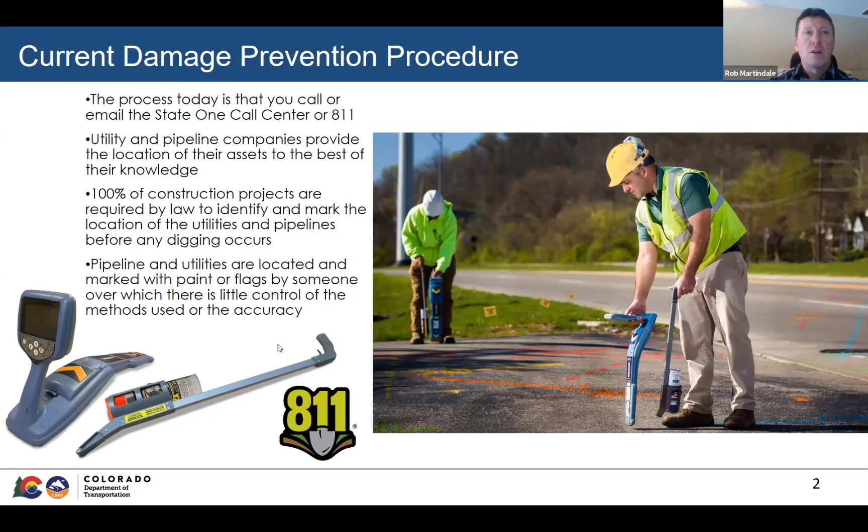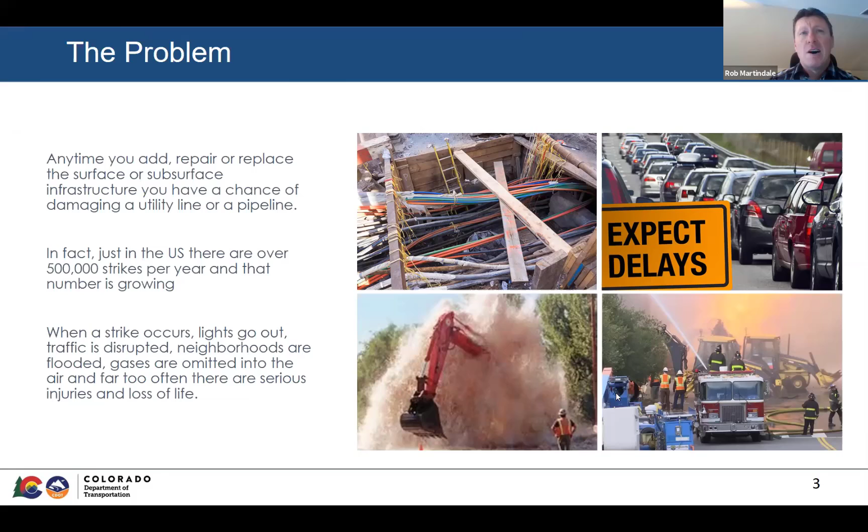Of course, we're still seeing a high degree of strikes in Colorado, and Jeff, you probably recognize these numbers because a lot of them come from you, but I don't know if this particular number in the United States is still hovering around 500,000 strikes a year, but it's a lot. It's too many to be functioning well. But some of it is because of agencies like CDOT allowing utilities in our rights of way without proper documentation on where they put them, how they installed them, things like that. So part of CDOT's efforts, which I'll talk about in detail a little bit more later, is trying to resolve

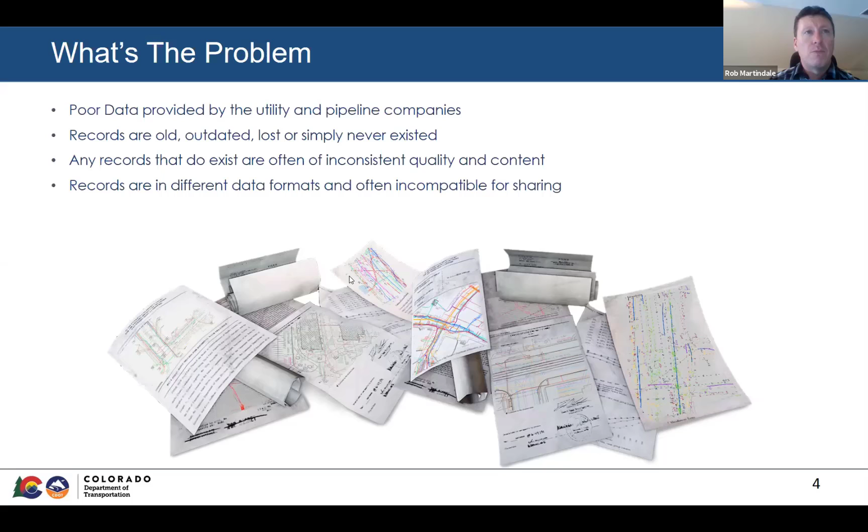some of that. Also, we see a lot of poor records, a lot of really bad records that are in the system or hardly legible. They're hard to figure out, and so a lot of the locators that are relying on these records, I think they struggle a little bit with even trying to understand what the utility owner has in the project area or in the one call area to actually try to find and locate. And so that's definitely a major sticking point that we've found throughout our investigation with research and whatnot.

Here's another example of just an as-built record that we've seen. And it's not to poke fun at anybody, but it's just to show that there are better ways today than maybe in the past to document utility installations.

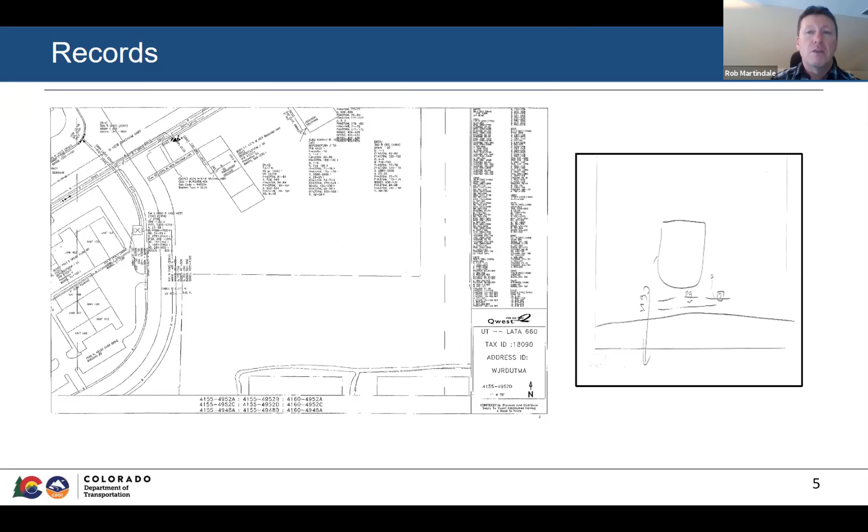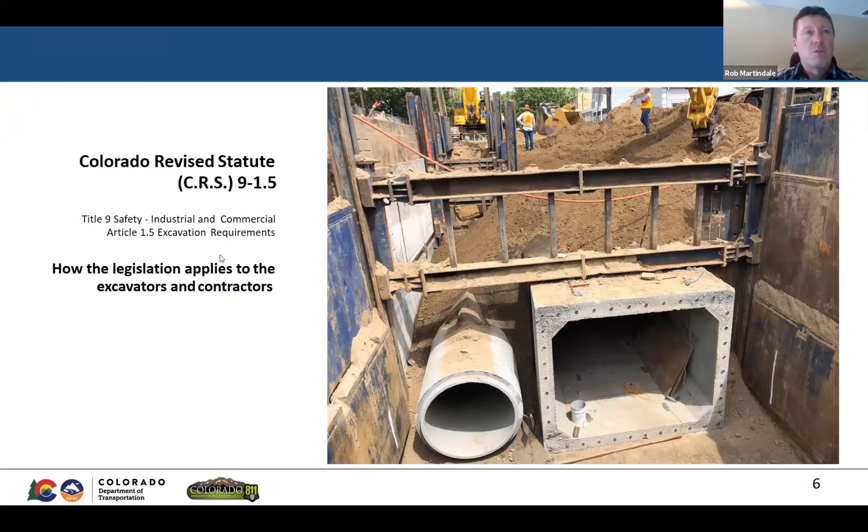So in Colorado in 2018, there was a bill that went through and became Colorado state statute, modifying our Colorado Revised Statute 9-1.5, our excavation requirements statute, which has been on the books for a long time. The modification did a couple of unique things, including new subsurface utility engineering requirements for pre-construction. The One Call Center became the clearinghouse for engineering tickets. Historically in Colorado, engineering tickets had been a challenge to achieve locates on the ground prior to this legislation—likely it would never happen when it came to locating. So now there's actual subsurface utility notification required by state statute.

So the engineer of record for a CDOT project, for example, would enter the one call ticket for engineering. There's a 10 business day requirement for the utility company to reply to that ticket with their best available records. A lot of times our subsurface utility engineering vendors then take those records and work toward developing a stamped plan set depicting these utilities at their achieved quality levels, based on a standard set forth by the American Society of Civil Engineers, the ASCE. Their standard is currently under section 38-02, with a new version, 38-21, coming out in 2021, defining the quality levels, how to achieve them, and related definitions.

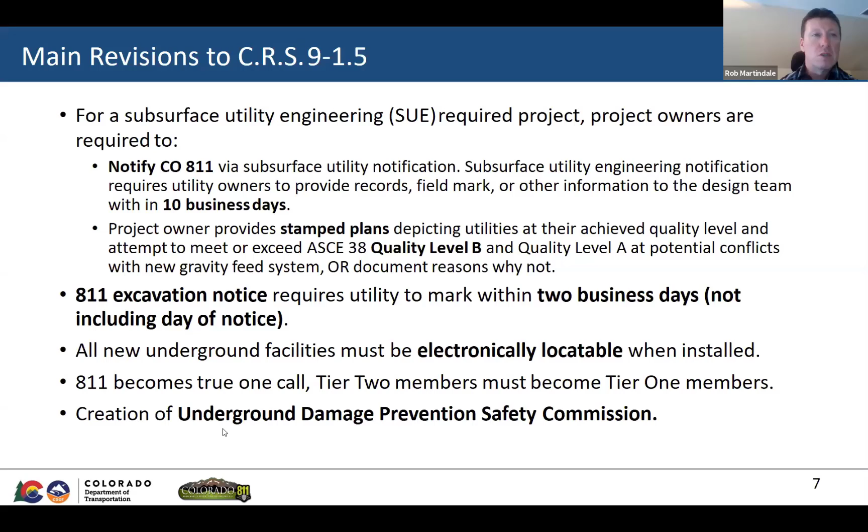The creation of an Underground Damage Prevention Safety Commission was also a big change for Colorado. We didn't really have any teeth in our one call law to hold utility companies or agencies accountable for lack of performance or whatever's going on. Our Damage Prevention Safety Commission is made up of 15 commissioners appointed by our governor, representing different sectors—telecom, the gas and pipeline industry, transportation. So CDOT has a place there.

Colorado 811 has a commissioner, and so on and so forth. Their responsibility as commissioners is to meet monthly as a full commission, establish bylaws, codes of conduct, procedures, and regulations. So if there's a portion of the law that's too gray and it needs definition or needs refined, they have the ability and the power to establish some regulations or rules.

And then hearing complaints, they started hearing complaints as of last year. They were enacted January 1st of 2019, their first official workshop. So they've been at it almost 2 years, and established best practices. Their committee hears these complaints monthly. They're registered as voluntary complaints through an email system, with an electronic form that's filled out.

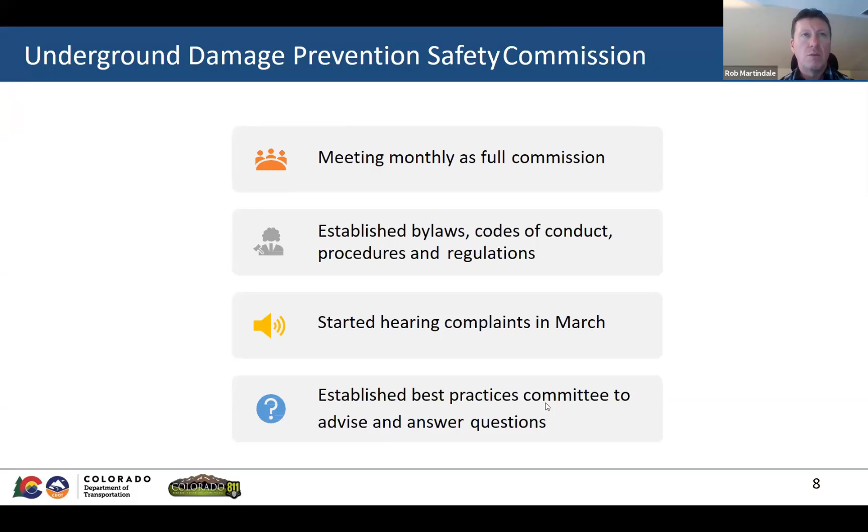So the best practices has come through with SUE. They have SUE best practices out, and they have a best practices for what 'locatable' means, and they're revising it to include survey positions along with tracer wire, marker balls, things like that.

So what is CDOT up to with our technology? We're trying to move into a more proactive utility database that will allow us to do quality control, quality assurance on some of the data we're seeing from one call tickets, from our SUE vendors, and records in general.

We recognize that there's a lot of different utility record databases out there, and we really struggled to find a database that would accept all this different utility information, not only from the field, but from legacy systems like GIS and CAD, mostly for our purposes. Then any new SUE data collected in the field, we could funnel through our database and move it through to our CAD system, which was also one of the workflows we were looking at.

Under the construction side, with new one-call locates, new installations, as-builting relocations, and planning for future projects, we were trying to grab a central location to pull all that in, and also have the ability to share that with end users or stakeholders that have a stake in the game with us, the utility companies in our right-of-way. If we have a good set of records that are better than what you have in your system, why not share that with the utility companies so everybody is working with the best and most accurate information.

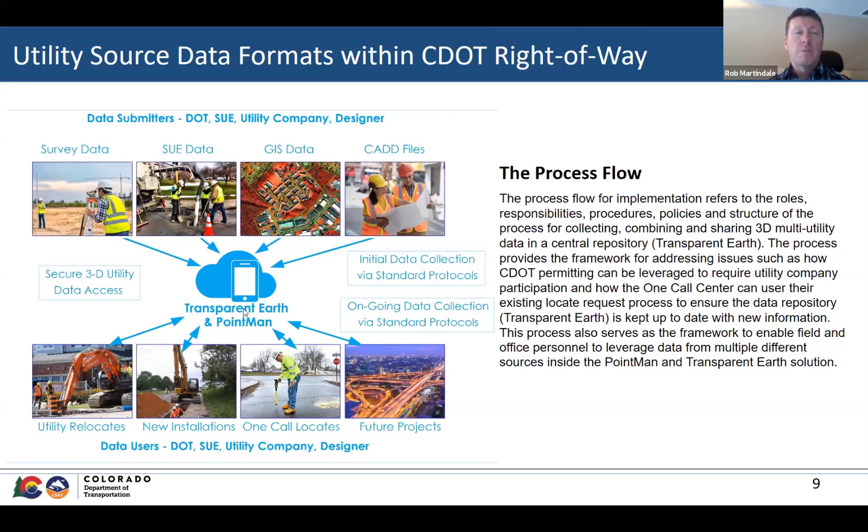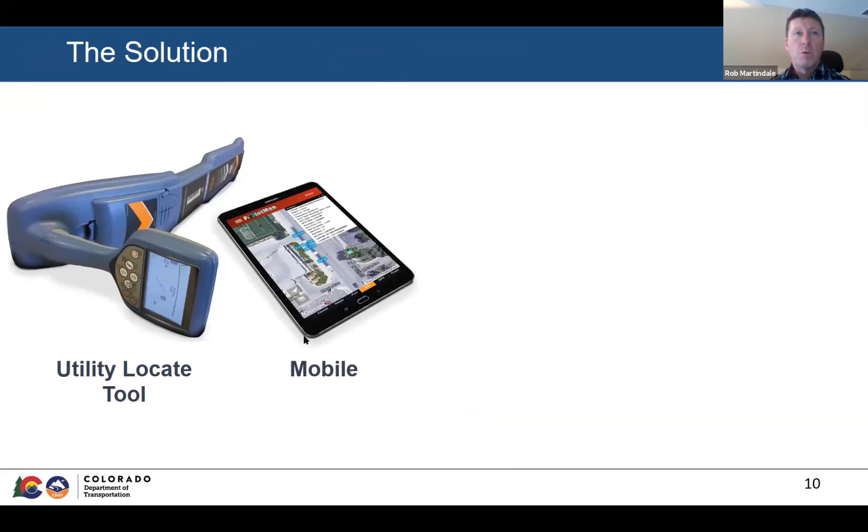So our two products that we use, Transparent Earth and PointMan, are paired together. They're an off-the-shelf cloud-based system that leverages utility locating tools along with the mobile app, Pointman, and GPS receivers from Trimble and others. Mostly what's important here is they're high accuracy GPS receivers, survey grade accuracy RTK type receivers, which I'll point out in a minute why that's important. It's a cloud-based environment shared with multiple types of end users, including contractors, internal CDOT construction management, third-party inspectors, giving flexibility for everybody to work in this environment.

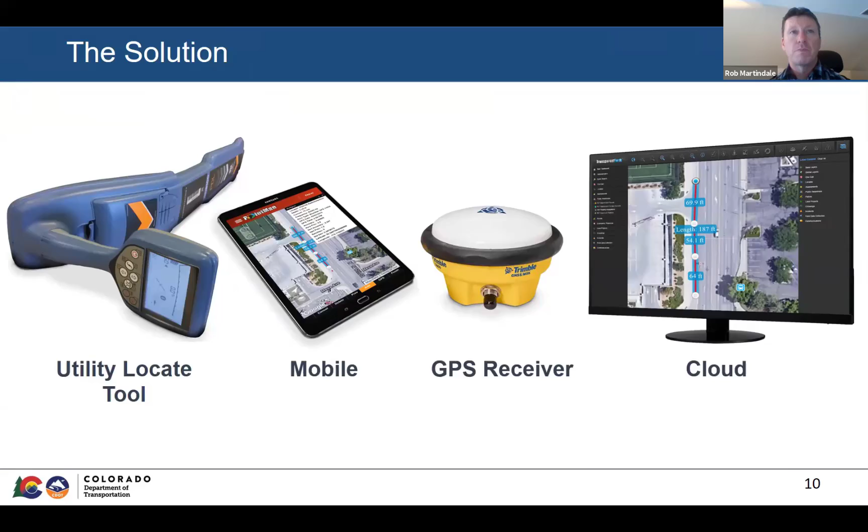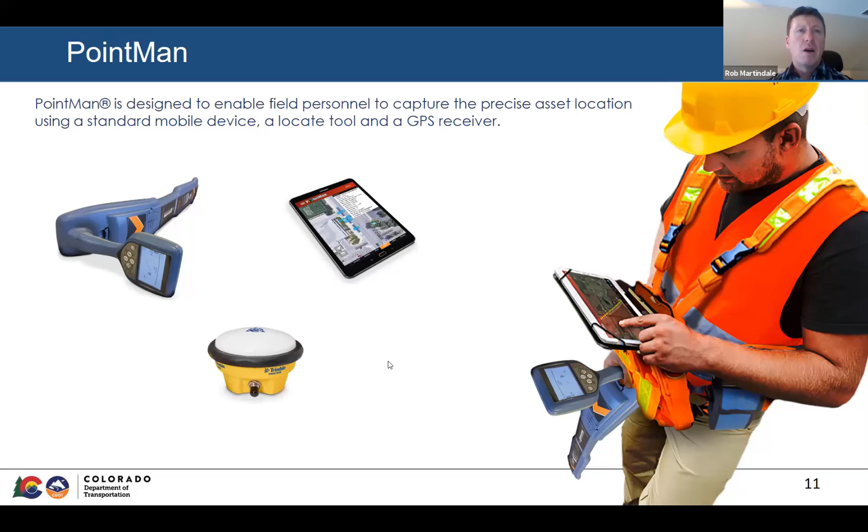Pointman is our mobile app, designed to enable field personnel to capture precise asset location using a standard mobile device and a locate tool. It's designed to pair up with the popular electromagnetic locating equipment, and there's quite a few that pair up with it now, along with GNSS antennas.

Transparent Earth is our traditional GIS database. What you guys would think of as a traditional GIS database, that's what Transparent Earth is, but it has a little bit more Google Earth functionality built into it than other GIS environments you'd see. There's Google Street View, Google Maps, Google Directions. So if you have a pipeline you're trying to send one of your inspectors to, you can send them through the mobile app and have them navigate to it with Google Directions right in the map or app.

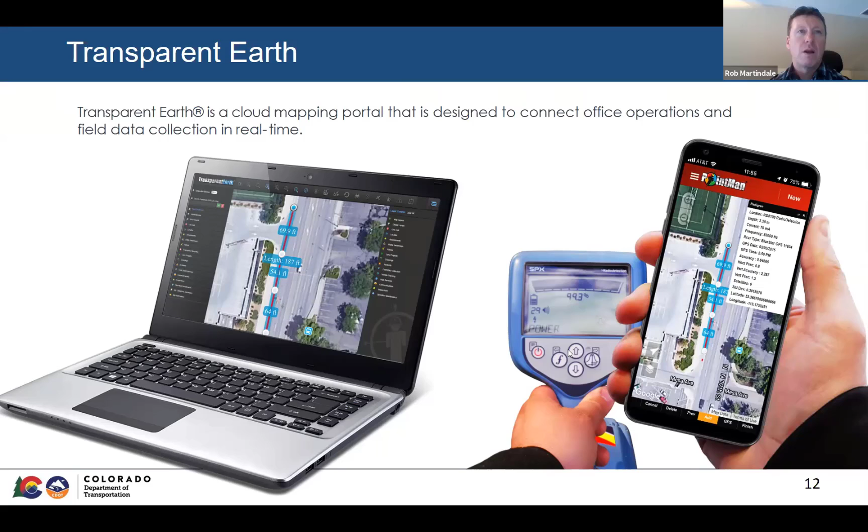When it comes to CDOT's accuracy requirements, we have a whole specification on permitting accuracies and as-built accuracies. Our utility companies are aware of the new standards that require them to as-built their new utilities at centimeter accuracy, about 2 centimeters or so, both horizontally and vertically.

So when you look at what's on the screen, these are just screenshots of the mobile app, Pointman. You'll see that there's a pedigree record here built into the software, and we really like this system because of the records we get on the survey side of things.

So what this is telling me with this water line, one of our subsurface utility engineering providers had gone out, hooked up to this water line, using a Metrotech VLOC 3 Pro locator along with the Pointman app, and they were using an RTK antenna. Not sure which one, but it tells me that it was survey fixed right there.

The accuracies horizontally were down to 0.05 of a foot, and vertically even a little bit lower. What's interesting is that when they were tracing this out, they were coupled with the GPS antenna, the locator, and the app, and you can see where they receive the depth, frequencies, and information out of the locator to help verify this record.

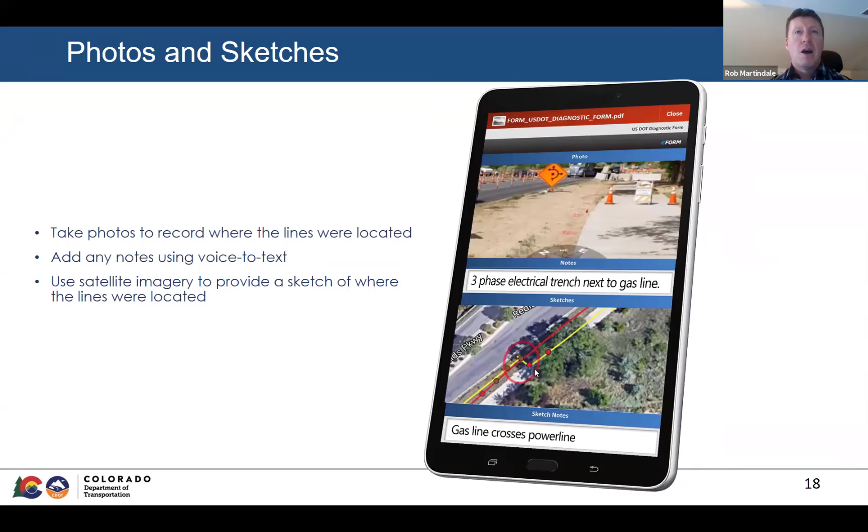So again, it really helps us if we have a really robust database, and not just two-dimensional, but three-dimensional, as we move into what's next.

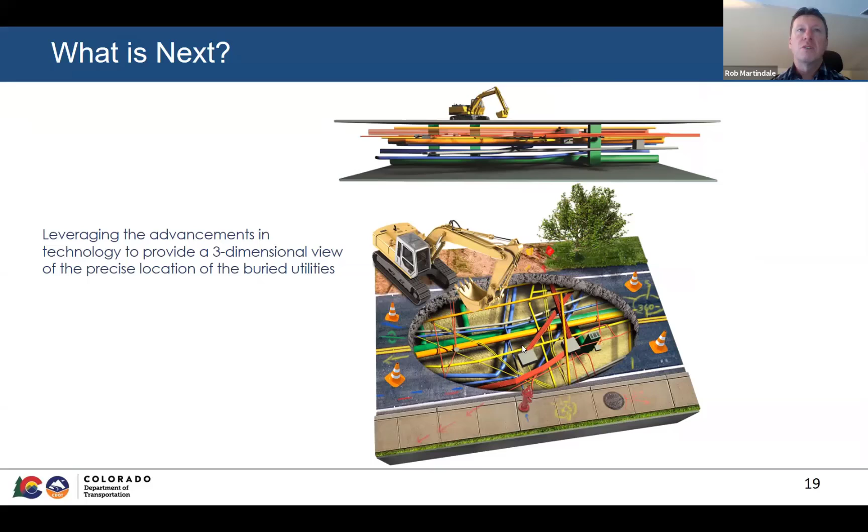And what's next is all this augmented reality, three-dimensional modeling, and not just for the design side, but for construction as well.

Then you look at how some of the SiteVision from Trimble works with augmented reality, and how that will be our next step with Pointman, to have this integration in our mobile app so that the data housed and verified through our records can quickly and easily be migrated into this environment, because the technology for collecting all this information in Pointman is the same technology used to display the three-dimensional augmented reality in Trimble SiteVision.

And then furthermore, there's even more futuristic stuff, where you get into excavation guidance and buffer zones, giving excavators the opportunity with this data to leverage it for alerts or notifications, like hey, your bucket's within a foot or so of a utility, so be aware of that.

So I think for the purposes of technology, this is where we're headed. But again, it starts with very highly accurate three-dimensional information, and without the technology we're leveraging now, I just don't see all these other cool things making it into the damage prevention world for us.

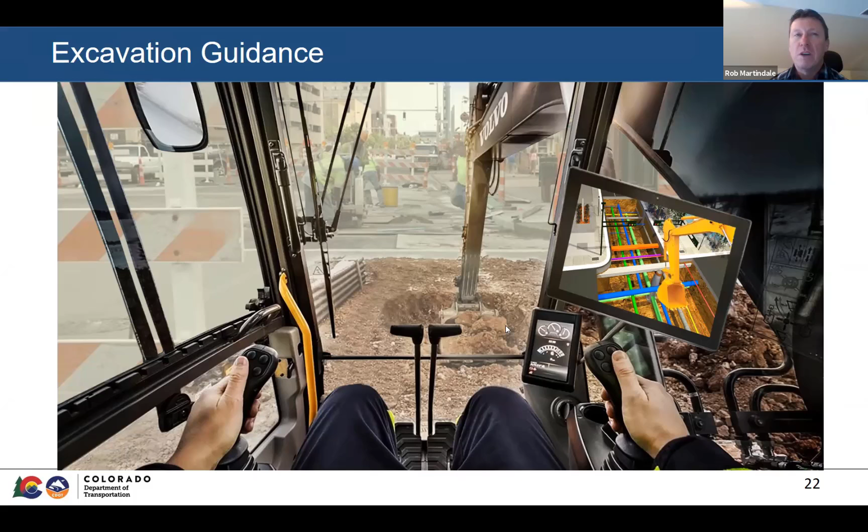So with that, I'll take any questions, and hopefully there's a few. Yeah, Rob. Yeah, sorry. So Rob, Barb here.

I just wanted to say that avoiding 100 strikes on a major project is really breakthrough results. One of the questions I have is, how far along are you in getting your rights-of-way mapped? Are you at the beginning, or is there so much legacy work to do? How will you go about this?

So our right-of-way GIS file is complete. We have a complete GIS map of our state rights-of-way in our Pointman mobile app. It's one of the layers that allows us to see where the limits are, and we provide that to utility companies to show them the expectation for where they cross into our right-of-way and where they exit it.

And how long did that take to get complete? That was about a 3-year effort. 3 years, okay. It took us a while, but we really did recognize that in order to manage all of our assets, not just the utility side but others, we really needed to know at least approximately where our rights-of-way, our limits, are at. Okay, thank you.

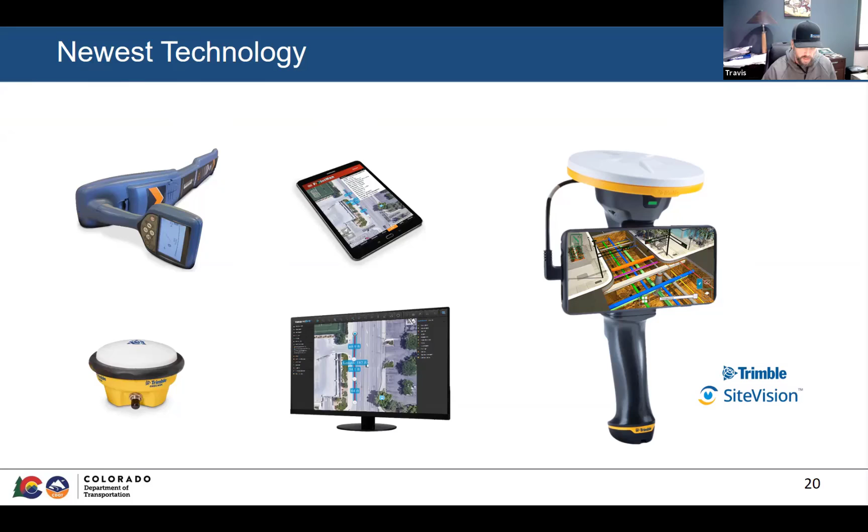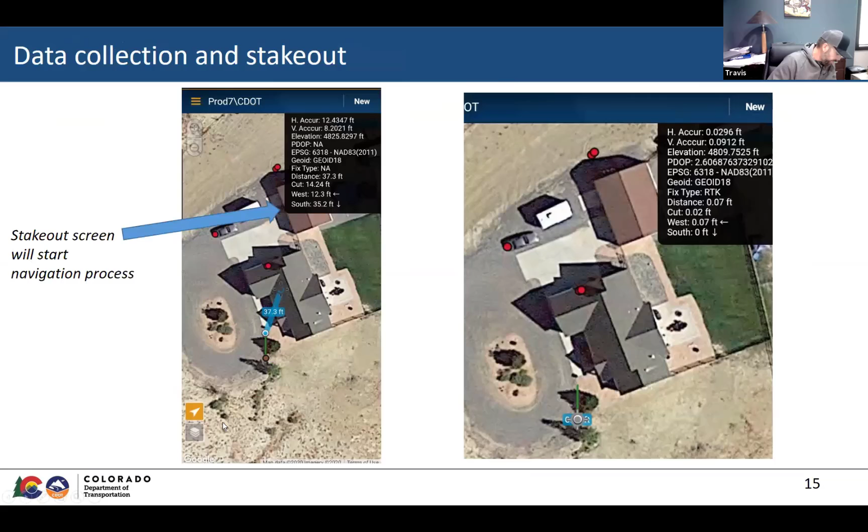On the metadata, the accuracy ratings and such—you showed an R10 there, and you're showing a catalyst system too. But the uncertainty levels, I don't know how you ended up settling on different horizontal accuracy, vertical accuracy, and uncertainty levels, because the Trimble has a hard time pushing a lot of that out. Are you specifically using Arrow or anything else? On top of that, you talked about the quality level found—I'm really interested in that. Does that mean when they're doing the work, daylighting or hydrovacuuming or exposing the utility, there's a layer within the app where they can verify they found it at this depth and it is at this location? Can you expand on that?

So your first question was around the metadata for the receivers? Yeah, the metadata for the receiver—I saw the accuracy, you got an accuracy number there, 0.0346 foot. I know offhand that the R10 doesn't just spit that out, so I'm wondering if that's coming from a calculation derived within the Pointman software. A lot of those accuracy numbers, I don't know—nobody can really explain to me where those numbers come from, other than that most of the time it's from a metadata sentence coming straight out of the GPS receiver. But Trimble doesn't quite do that; I've never been able to find a way. So anyway, I don't put a lot of credence in the accuracy numbers.

That's why I'm more interested in the quality level found data you're collecting when you expose something to verify those readings are correct. Yeah, so Trimble does stream this—they just lock it down to most users. But because Trimble and ProStar entered into a partnership, through their SDK they unlocked this for ProStar to capture the Trimble precision. So if you look at a Trimble data collector, like a TSC3 or one of their survey grade data collectors, this information is streamed into the survey record all the way through into a normal survey grade data collector. This level of information, along with other data, comes through, and ProStar has the ability to capture all this different metadata being broadcast by the R10.

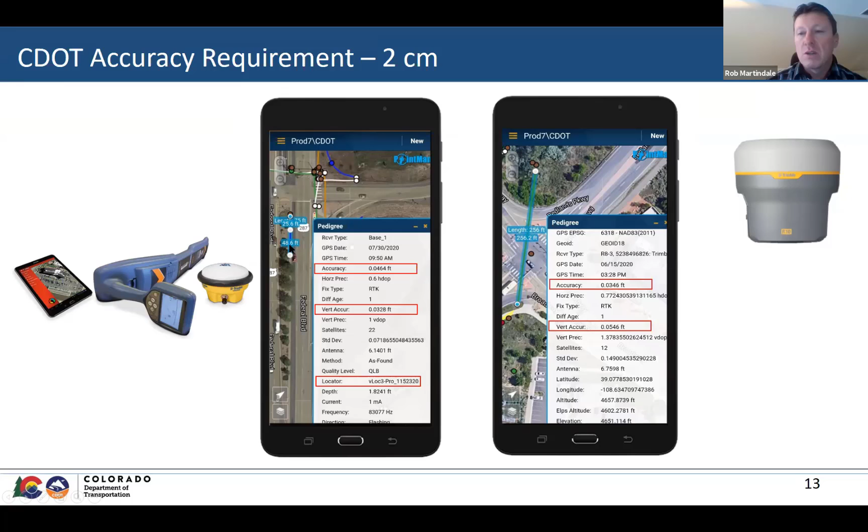And I haven't scrolled down to show you, but they can then daylight that and verify all this information rather quickly by going into this record and clicking on the water line, in this case, staking it back out, and then moving over to it. Once they've established where they're at, they could then hydrovac that.

And also if we get a locate for excavation and it's 4 or 5 feet off, maybe it's a bleed off or something from the locator. But we know that the record was collected as found as a quality level B, and it was surveyed in with an RTK unit, and it used a Metrotech locator or Radio Detection or whatever to establish it.

There's a good argument there that our position is probably better than the excavation locate, and we need to figure out, by daylighting it, we can say, look, that blue paint that's over there 10 feet away, this water line's actually over here where we've uncovered it, because we know it's right. So I think that's a great idea.

I was just wondering about the excavators and the quality, if they're actually having problems with RTK getting it hooked in, but that's the part that I really like. I like the verification. Hey, yes, it is right here and it's a positive result, instead of just going off the locator. What a lot of excavators have gone to, and some are doing this on their own,

some we're requiring it from the agency side, but we're supporting it with construction management staff that are utility specific inspectors. So they're actually managing the stakeout of this information, assisting the contractors in coordination efforts and as-builting and locating and all this good stuff. Some contractors find that it's better to bring in a small team to support this on larger utility projects. And the project that I mentioned that had 100 strikes avoided, that's what they have.